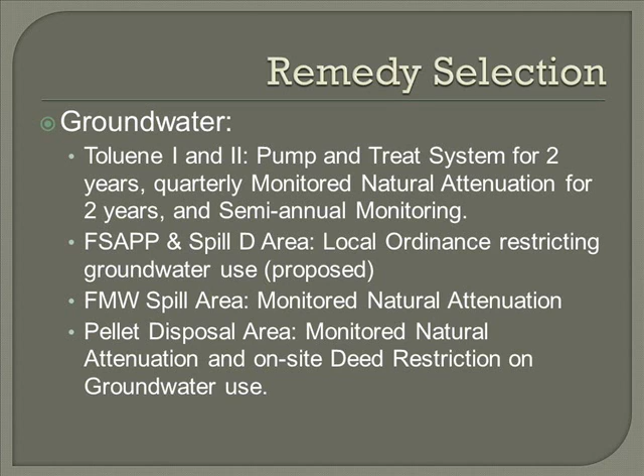To address groundwater contamination, the facility is also proposing specific corrective measures by waste management unit or area of concern, including engineering controls like pumping and treatment systems and monitoring, and institutional controls like a county ordinance and on-site deed restriction on groundwater use. This figure from the CMI work plan shows the locations of the Toluene 1 and 2 areas of concern.

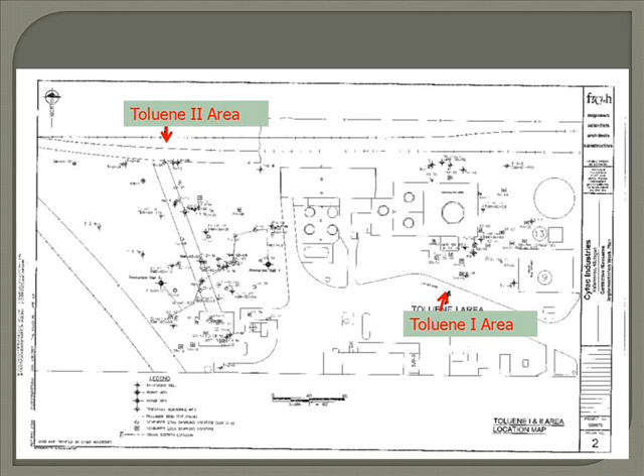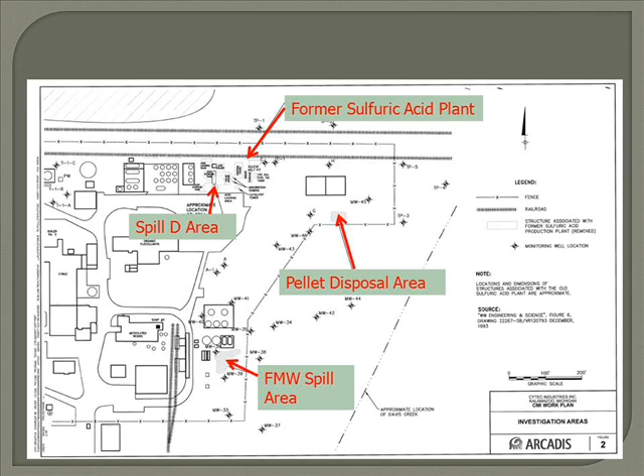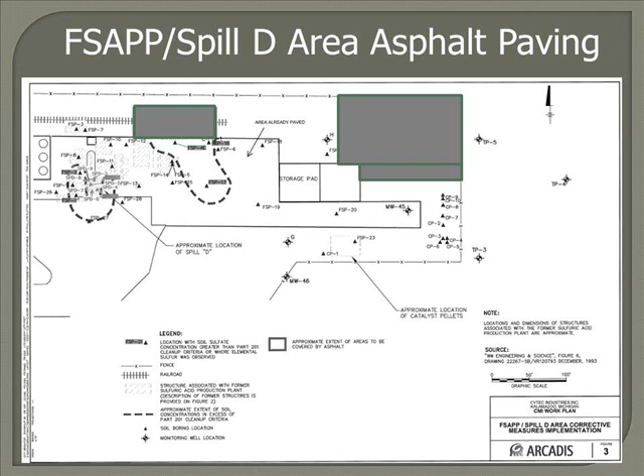This figure provides the locations of the sulfuric acid plant Spill D area, pellet disposal area, and FMW spill area waste management units. This slide shows the areas where additional asphalt paving is proposed and will have to be maintained as an exposure barrier corrective measure. This slide shows the area on-site where groundwater use will be restricted by a deed restriction.

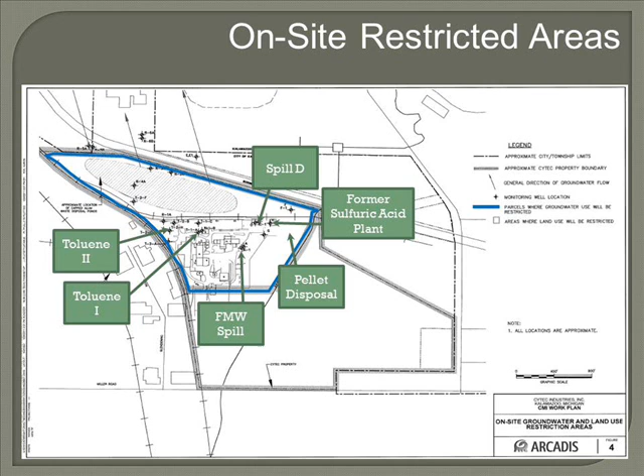The geology of the site consists of sand, gravel, silt, and clay layers that are unconsolidated. Those deposits are about 160 feet thick at this location, under which is bedrock. The first layer of bedrock is a shale. There are 3 basic geological units of concern, those being the unconsolidated deposits. The first is a shallow groundwater aquifer consisting of sand and gravel. Under that is a middle confining layer of sandy clay. Beneath that is another lower sand and gravel aquifer. Groundwater in this location flows in the sand and gravels to the north.

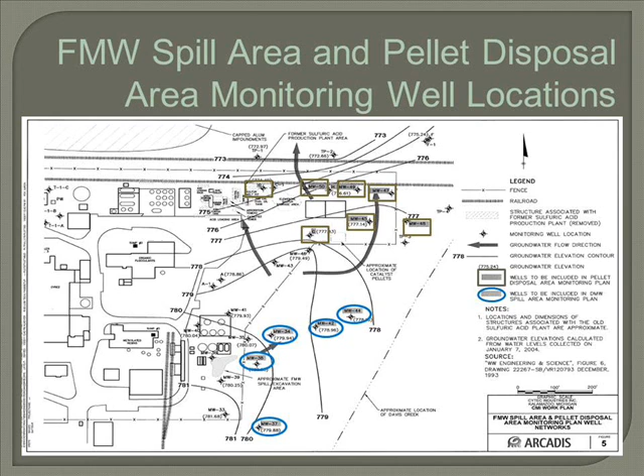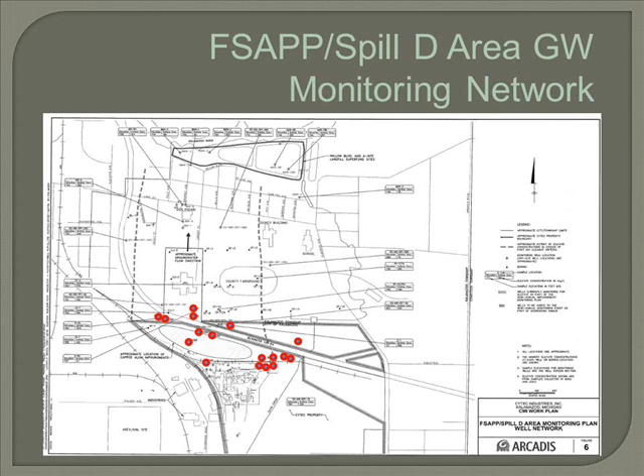The groundwater at the site is checked with a series of monitoring wells. At the northeast part of the site, this map shows the location of multiple wells that were put in to monitor the FMW spill area and the pellet disposal area. Other wells along the northern part of the site are shown on this map, covering the former sulfuric acid plant, another spill area, and the former alum ponds. Cytec will be required to continue groundwater monitoring in these wells to make sure contaminants are not migrating.

The Corrective Measures Implementation Work Plan also includes language for the restrictive covenants to be executed on the property deed. In part, the restrictive covenants will prohibit the use of groundwater, any removal of asphalt, concrete, or vegetated soil serving as exposure barriers for contaminated soils, any activities that disturb or damage the function of the groundwater monitoring system, any excavation, drilling, subsurface utility work, or movement of soil in those areas protected by the exposure barriers, unless approval is granted by the DEQ. Any disturbed exposure barriers must be reestablished.

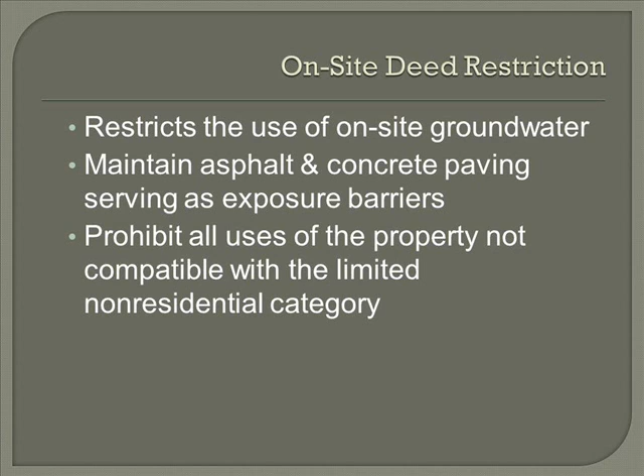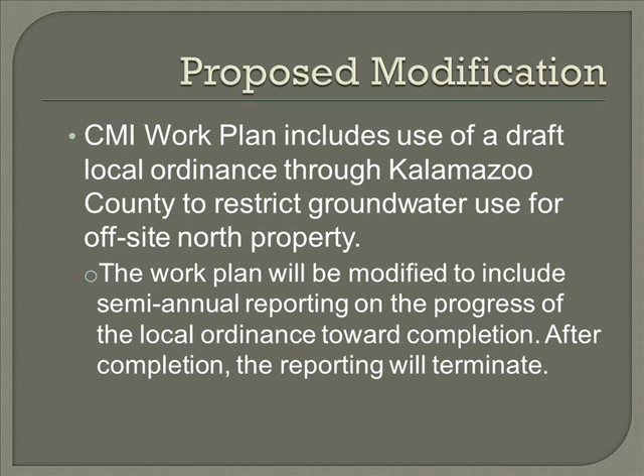All uses of the property not compatible with the cleanup category established under Part 201 of Act 451 will also be prohibited. The MDEQ is proposing to modify the Corrective Measures Implementation Work Plans for approval. Since the Kalamazoo County Ordinance restricting off-site groundwater use in the plume of groundwater contamination from the facility is not yet final, Cytec will be required, as part of the CMI work plan, to provide the MDEQ with semi-annual reports on the progress of the local ordinance towards completion as a final ordinance to control groundwater usage. This map shows the approximate location of the proposed groundwater restriction zone being proposed as a local ordinance.

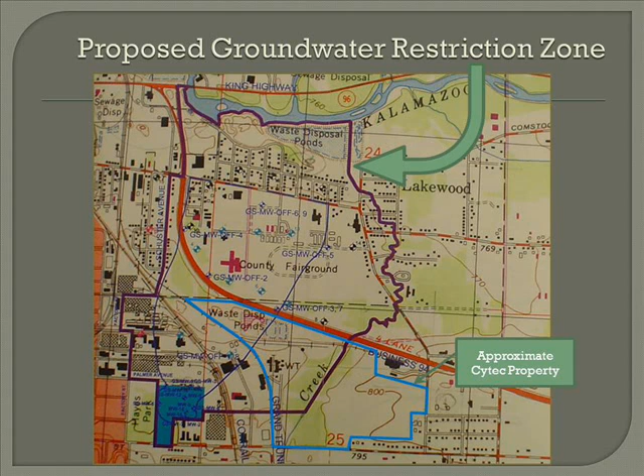The MDEQ has completed its review of the CMI work plans, but is seeking public input. CMI work plans and more information about the facility may be reviewed on the DEQ website. Before issuing a final decision, the DEQ will evaluate all comments received during the public comment period. The final decision will be communicated to all persons on the facility mailing list. The comment period ends January 25, 2013.

Written comments, requests to be placed on the facility mailing list, and all other requests for information should be directed to Daniel Daly, Michigan Department of Environmental Quality, Office of Waste Management and Environmental Response, Post Office Box 30241, Lansing, Michigan 48909, or via email at dalyd@michigan.gov.